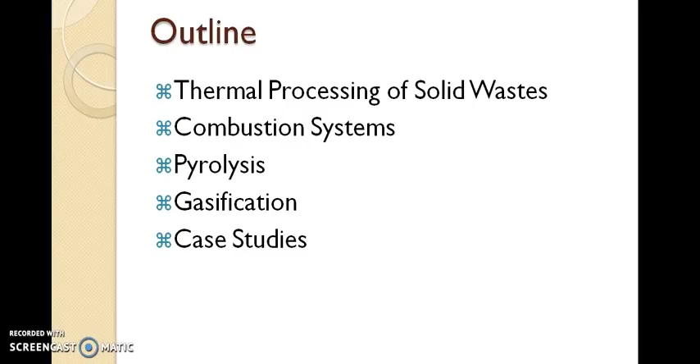Thermal processing is the conversion of waste into gaseous, liquid, or solid phase, with or without energy valorization. This process depends upon the requirement of air in the thermal ignition or burning of waste. Depending on that, there are three basic types: first is combustion, second is gasification, and third is pyrolysis.

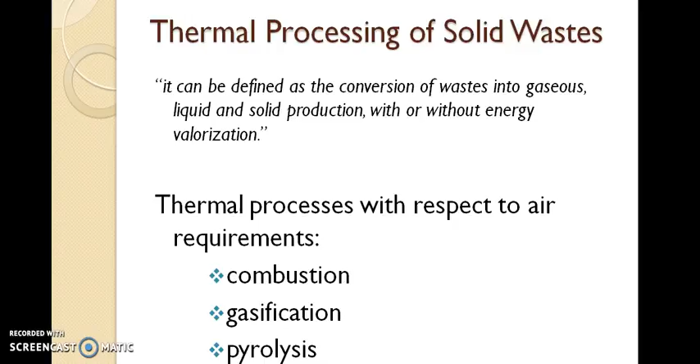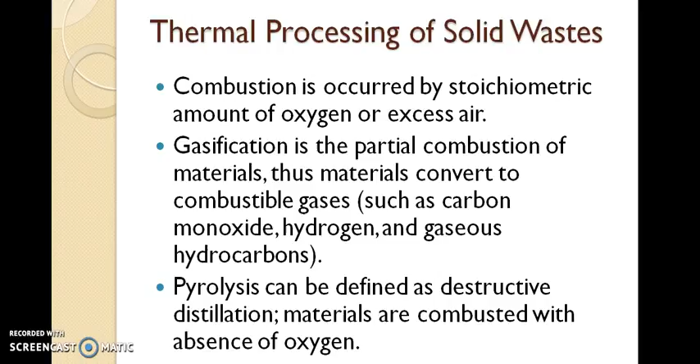Now let's see the thermal processing concept. Combustion occurs by stoichiometric amount of oxygen, that is, it requires excess air, whereas gasification requires partial combustion of materials, converting them to combustible gases like carbon monoxide, hydrogen, and gaseous hydrocarbons. Lastly, pyrolysis, a destructive distillation process, combusts materials in absence of air. Depending upon the basic requirement of air, thermal processing can be carried out for solid waste management.

Here is a comparative chart of processes and products. The first column shows conversion technology, the second column shows primary products, such as tar and oils, gases, and heat. Product recovery is shown in the third column in terms of extraction, upgrading, and synthesis. Energy recovery can be done by gas turbines, engines, and boilers. After product or energy recovery, secondary products remaining are chemicals, gasoline, methanol, ammonia, and electricity.

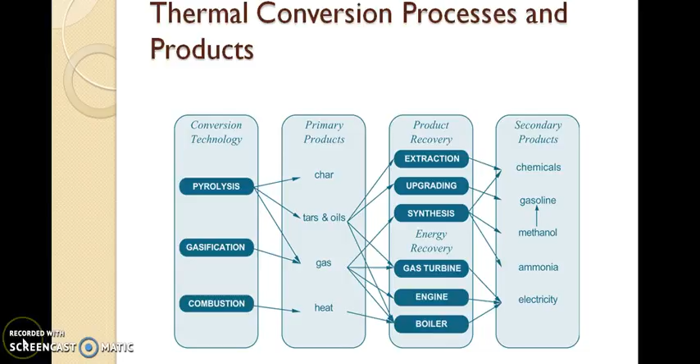Now we will see a demo on the process of combustion.

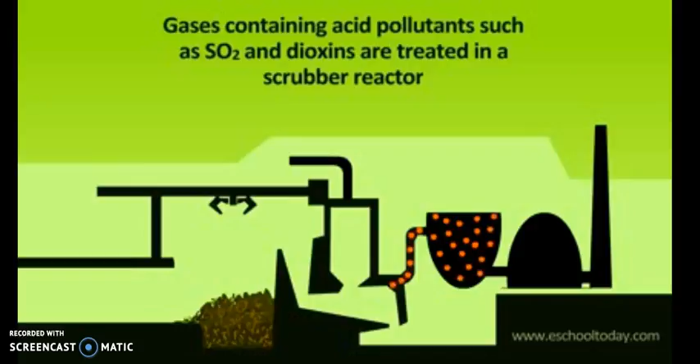I hope the video has cleared your idea about what exactly happens in a combustion system - incineration or ignition or burning. Incineration systems, generally known as incinerators, involve application of combustion process under controlled conditions, which allows waste to get converted into inert minerals, ash, or gases. Depending upon the types of incinerators used, combustion systems are mainly designed.

Now let us list out the types of incinerators. There are mainly 4 types: first is fixed hearth incinerator, second is rotary kiln incinerator, third is refuse derived fuel incinerator (RDF incinerator), and lastly fluidized bed incinerator.

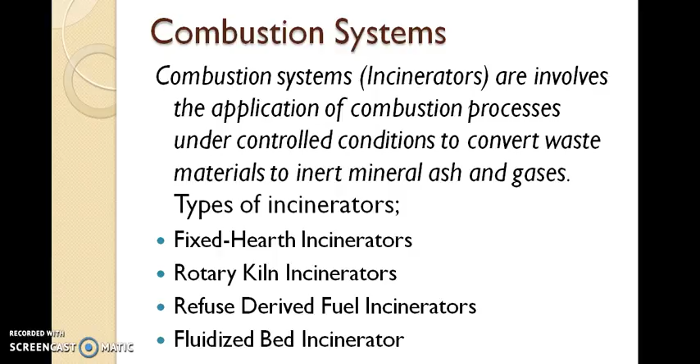The second process under thermal treatment for solid waste management is pyrolysis. It is one of the recycling processes which allows non-combustion heat treatment that chemically decomposes waste material by application of heat in an oxygen-free environment - there is no requirement of oxygen. It is an endothermic reaction requiring an input of energy, typically applied indirectly through the walls of the reactor.

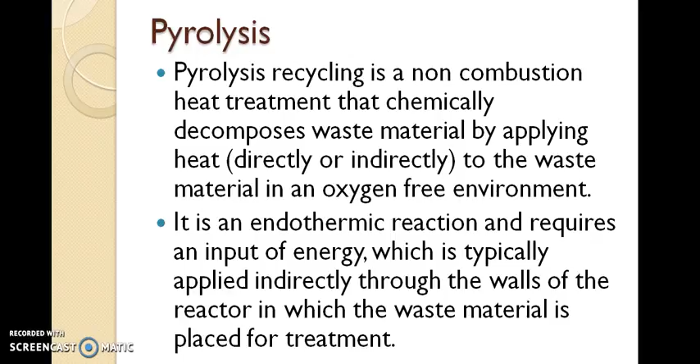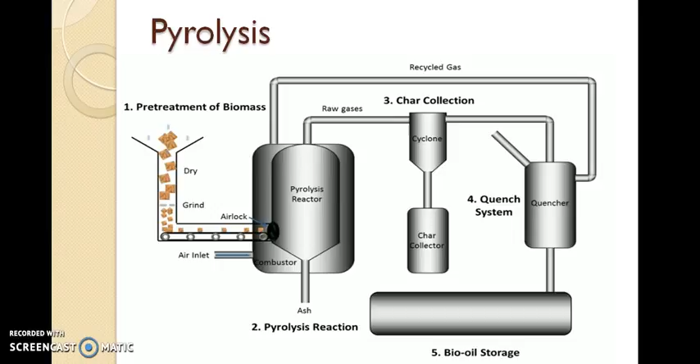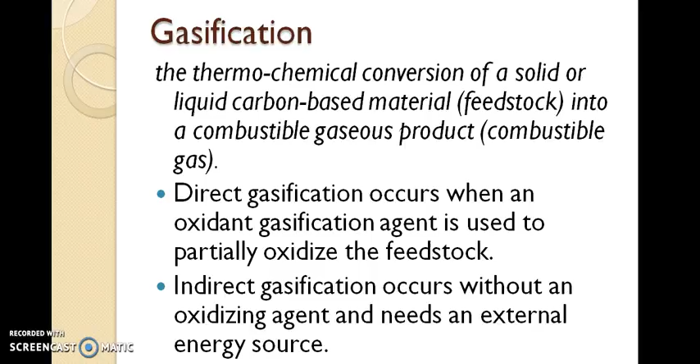Next is gasification. It is thermochemical conversion of solid or liquid carbon-based material, known as feedstock, into combustible gaseous product. Direct gasification occurs due to partially oxidized materials, and indirect gasification occurs without an oxidizing agent as it needs an external energy source.

This is the flow diagram showing the gasification process. Direct gasification and indirect gasification processes are shown after feeding carbon-based material to the treatment plant, and the end products are gases, tar, and char.

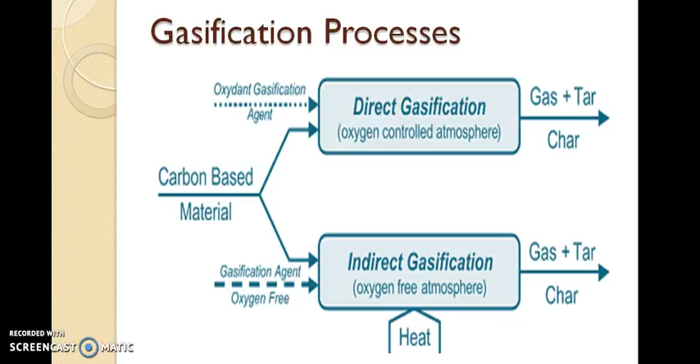So now we will see another small video giving you an idea about the incineration difference.